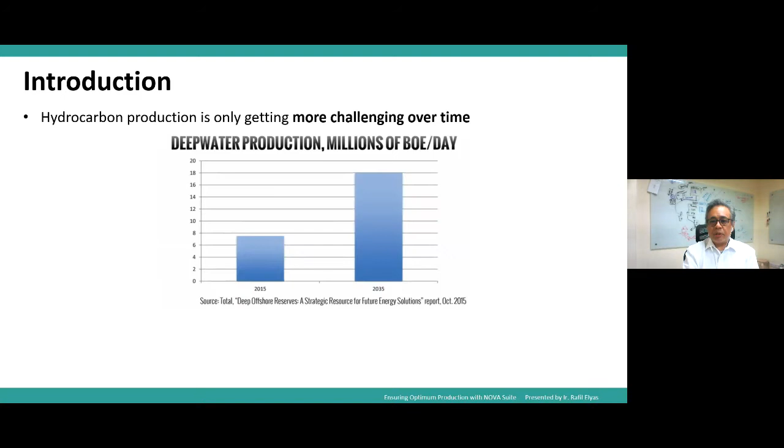There is a lot of pressure to reduce capital and operational expenditure, reduce risk, quantify profits, and provide business KPIs. If we take a look at deep water production, for example, hydrocarbon production is getting more and more challenging over time as we go into deep water production activities.

Within our business arsenal, simulation software and simulation tools are one of the things we use to reduce risks and quantify profits. So there's a lot of pressure to reduce capex and opex, and when we're evaluating different strategies, operating procedures, or technologies, we tend to find that simulation plays an important part of that.

A lot of innovation in the field of hydrocarbon production and processing is driven by the use of mathematical models or simulation.

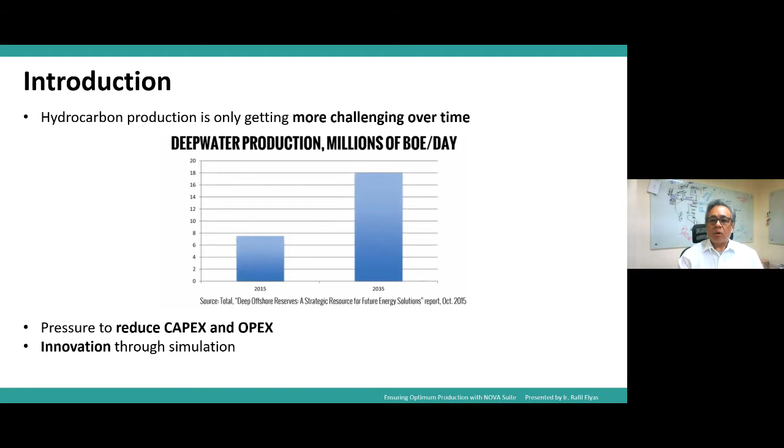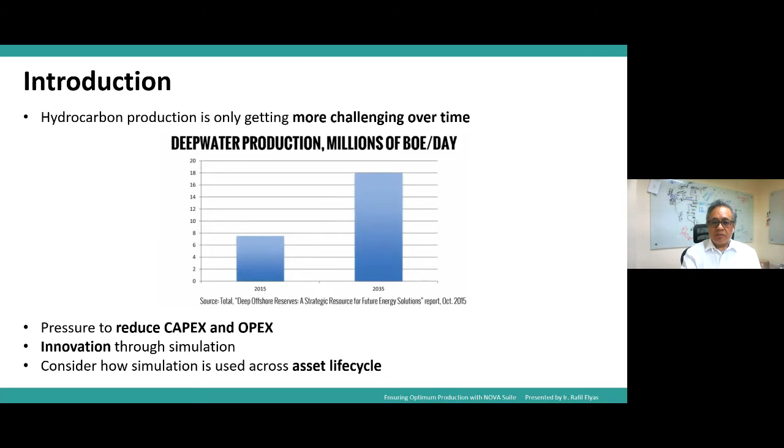So if we consider how simulation is used in the life cycle of an asset, typically we take a look at new opportunities, and within these new opportunities we would have to perform feasibility studies and conceptual designs. These are the kinds of things we would be addressing at this phase of asset development.

This might be some form of conceptual study, feasibility study, or pre-FEED. Based on this, we would have to start quantifying how much it's going to cost to develop this particular opportunity in terms of the assets we have to construct. So normally in these phases, you'll do some kind of computation, plus or minus 40-50%.

After that, if we're in the oil and gas business, we'd go into front-end engineering design. If downstream, you go into basic design. At this stage, we would perform computations to look at equipment parameters and roughly equipment sizing. If upstream, we'd look at field layouts, pipeline routing, pipeline sizes, etc., taking into account all the different flow challenges we would see. So there would be this type of computation at this phase of the asset.

Once we get some preliminary information, this will allow us to perform computations within plus or minus about 20-30%, again an estimate. At every phase, we'll be taking a look at costs and benefits.

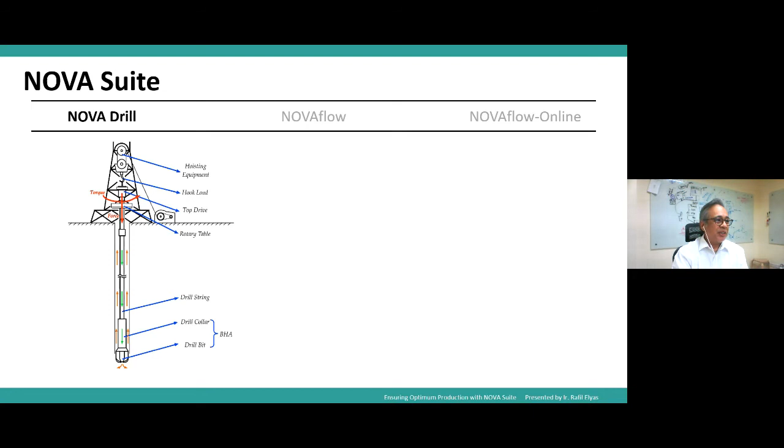So what does this Nova suite of applications consist of? Well, the first is Nova Drill. Let me preface this up front - I'm not a driller, so I might represent the discipline badly. If I do, don't be shy to chuck something in the chat saying, hey, stick to processes and molecules.

But Nova Drill is one of the applications coming out of Nova Suite. It came up because there was a requirement from a company in Asia where they wanted to create a real-time drilling monitoring center. Whenever they do a drilling campaign, they want to have this shadow drill, this virtual drill, happening. So if they have problems, they can immediately turn to these shadow models to troubleshoot. If I have a sudden gas kick happening, I can use my model to look at different strategies. So it'd be like a digital twin of a drill.

A lot of times when we look at drilling software out there, I'm not saying all, but quite a bit tends to be based on steady state drilling models. I know there are some tools which are multi-phase transient, but a lot of the tools out there are not able to model important transient phenomena like well kick, and sometimes there's an effort to rerun when the inputs have changed. So a lot of the drilling applications, when I say they're not really transient - to be detailed, what I mean is they're dynamic, but based on pseudo steady state approximations, and there are some limitations to that.

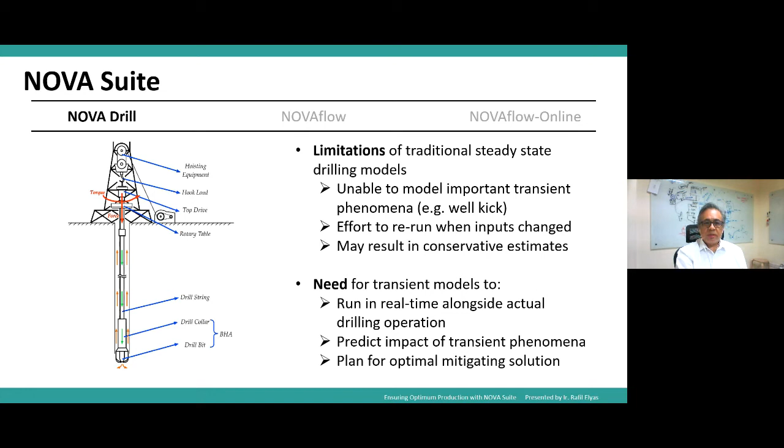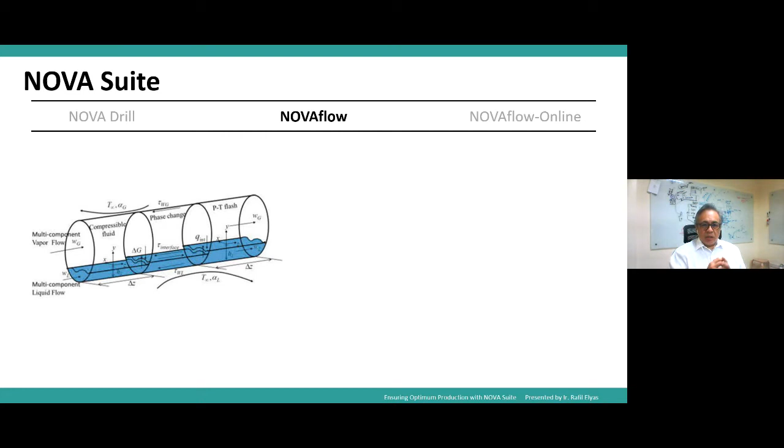The next is Nova Flow, or Nova Flow Pipe, and this is essentially looking at multi-phase fluid flow in a pipe. If we take a look at traditional transient multi-phase one-dimensional models out there, there tends to be a steep learning curve. And as I've articulated earlier, there's been a lot of effort to add more physics, more representations of the Navier-Stokes equations, which results in fairly slow runs because it's so complicated. It takes a long time to run, and we find there's a point of diminishing returns - you add more resolution, more mechanistic reality, but your returns don't really improve so much.

So there needs to be flow assurance models that are easier to use, which allow you to run faster than real time, and quickly and automatically self-tune. This is important because, as I mentioned, project schedules are getting more and more aggressive. Resources are getting lower, everyone is being more competitive. We need to be able to adapt quickly, we need to have some agility in our design.

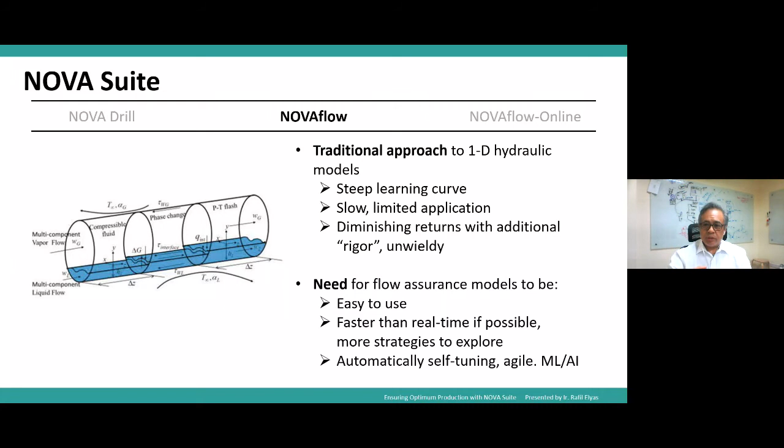I get some initial production data or predictions from petroleum engineering or reservoir engineering. So this is my production profile, this is my gas oil ratio. And I start designing things. I design my pipeline, I design my facility. I calculate all of my set points based on this production profile and this GOR. And I'm using this for front-end engineering design.

And as I go into detailed design, something has changed. Why? Because things are always changing in the field for whatever reason. Now I can't access these wells, I'm looking at bringing in some other wells, or I have another opportunity. I can bring in some additional hydrocarbon storage resource, and I want to pull these wells in. So now I want to increase my throughput, and my GOR has changed. So you need to do a new set of runs. And by this time, you're getting into detailed design.

And things must happen faster. So we need to have faster computations and faster representations of our solution space.

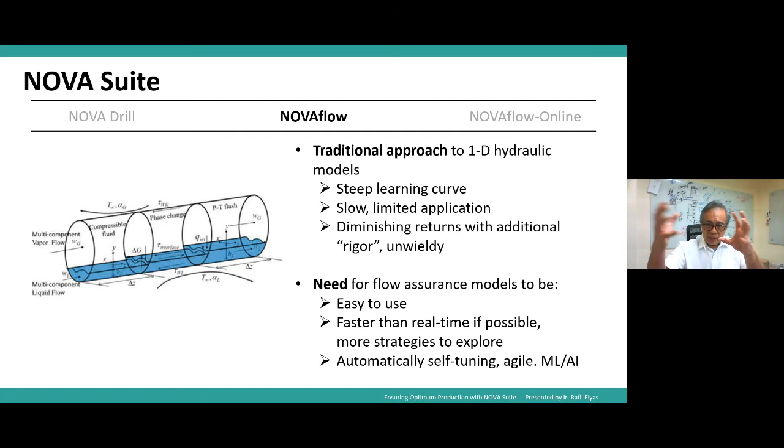So that is a NovaFlow, a pipeline, transient pipeline type application.

So now I'd like to talk about NovaFlow Online. Another particular area that we have is what's known these days as digital oil field. There are many types of applications out there, and we've used and supported many different types of tools. Everything from tools like 4Gas for gas field management, production, and optimization, to various types of back blending and back allocation applications used by various operating companies.

And one of the things that we found when working with these kinds of oil field type applications is that a lot of times information exists in silos. You have data from OFM, you have data from various types of reports, they're all over the place. A lot of the mitigation, or a lot of the activities, tend to be reactive, and there's a lot of uncertainty in terms of estimates.

What we're looking at here is a new way to design and operate your facilities. We're looking at these models, updated based on field data, and the way we're envisioning it, since these models are updated all the time, operations can use it for day-to-day troubleshooting. At the same time, you can also deploy these models to contractors to make sure the models they're working with are consistent.

So ultimately, this is all based on a cloud-based solution, so you can manage and assign permissions to these models for various people to use. You can create accounts.

So let's say you're a big oil and gas operator, you've got all of this data in Pi. You can start using it to tune your models, have those tuned models sitting on the cloud, and your operations team can use it. If you're outsourcing some brownfield work and you'd like another organization to look at sizing or debottlenecking, you can assign permissions and allow a third party to access that. Of course, there's a lot of cybersecurity that one needs to set up, and I'm not going to pretend I know how all of that works at this point in time.

But we've got an IT group who are familiar with all of these types of activities.

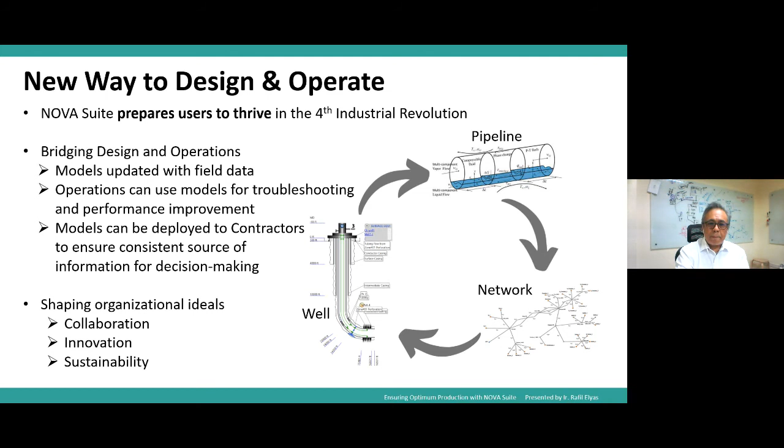Okay, so let me jump real quick into digital oil field applications with NovaFlow. This is kind of what it's going to look like so far.

So this is essentially going to be a cloud-based application. When I say cloud, there are many ways one can deploy a cloud. One would be a public cloud, like Google Documents, where anyone can log in. Or if you're a very large organization with your own oil and gas company net, you could place this on one server and deploy it to all of your users. So it's a cloud, but it's within your particular network.

The nice thing about cloud applications is it takes away the cost of ownership for a lot of your users. Right now, if you want to run a sophisticated piece of software, you need to buy a high-powered computer, and you need to manage all the different version controls, patches, etc. That can be a real pain, you need your IT group to manage that, and you spend a lot of money on hardware.

So now I think everyone's moving to the cloud, it's not a new thing. For some of us here, probably from the 1980s and 1970s, a lot of us in school used mainframes and dumb terminals. So it looks like it's going back to that model, where you have everything in a mainframe or a cloud, and you're working with low power, thin clients to interface with your computational engine. I think everything is circular - fashion, computing, all goes back. I'm just hoping flare pants don't come back again.

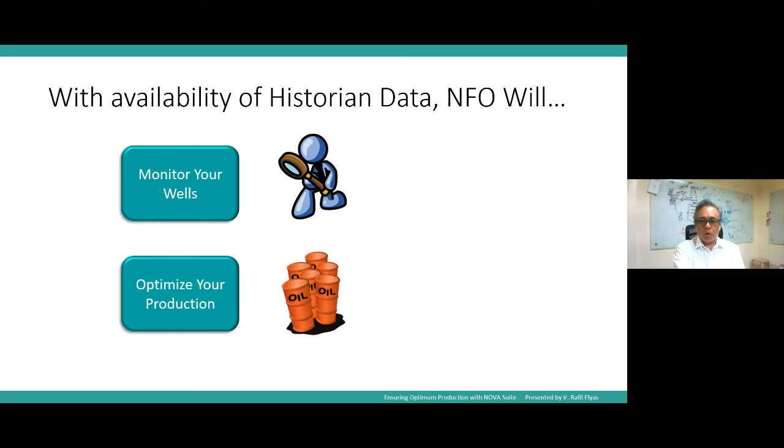When we have a lot of availability of data on data historians, a lot of organizations are using tools like Pi, or if you're an Aspen house, you'd be using IP21, or if you're a Honeywell user, you'd be using something like PhD. What NovaFlow Online will allow you to do is monitor your wells and optimize your production.

What we're looking at is essentially tracking and visualizing your well performance in real time - we'll show another slide where we can actually see what this means. But it's obviously interesting to know where you're operating and what the implication of your operating point is.

You always want to make sure you can understand or determine where your well production envelopes are - safe operating envelopes, optimum operating envelopes - and make sure you're operating within these limits. You also want to be able to identify well underperformance.

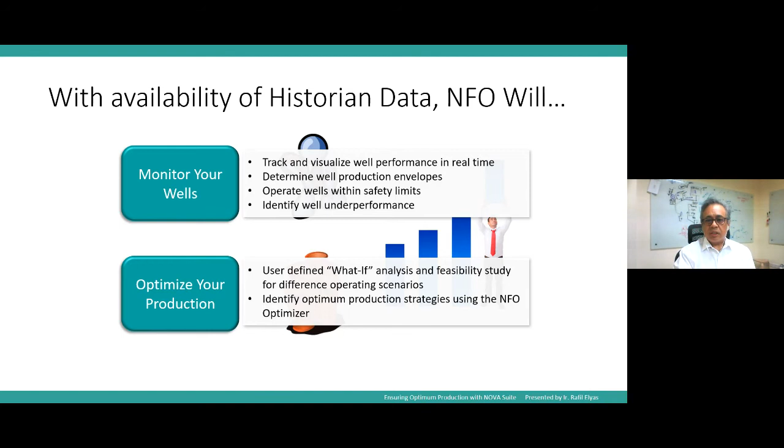You want to be able to optimize your production, put together case studies, do what-if studies, feasibility studies, take a look at different operating envelopes, and take a look at a solution space rapidly. You want to be able to identify potential optimum production strategies, and this can be done using the NFO optimizer.

So these limits might come from various sources. Your optimum limit might come from a computation. NovaFlow also has the well tubing model in place, so you can calculate what your optimum limit is going to be. Your safety limit might come from field advice. All of these can be implemented within this particular view, so you always know where you're at.

And you'll essentially be exchanging information with your data center. So if you've got stuff in Pi, then it'll be stored in Pi. And then we'll have an optimizer layer, which will allow you to run your case studies and to essentially calculate your optimum points.

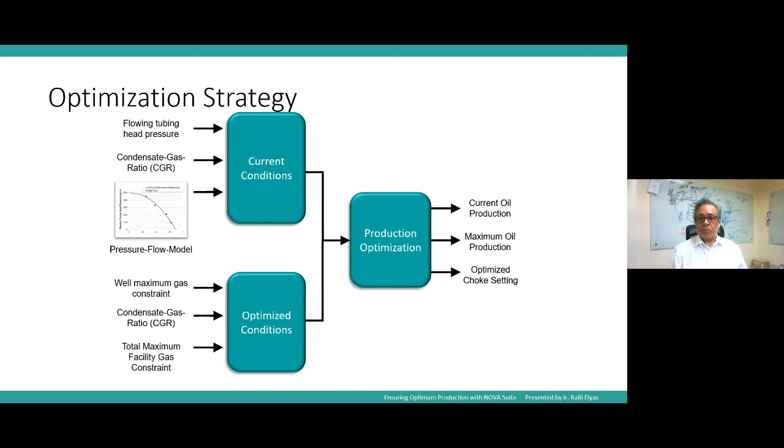They're just running many calculations very quickly. Nowadays, with multi-core CPUs and multi-CPU machines, we can parallelize a lot of computations, so things can happen a lot quicker. Essentially, the hardware has caught up with a lot of the scientific and mathematical theory that's been around since the 1960s and 1970s.

What if studies in optimizations? This is an interesting activity as well. So say, for example, in this particular case, I've got 3 wellheads going into one central processing platform - Alpha, Bravo, and Charlie - and they're feeding in. Let's say in this case, everything is up and running, and I've got my production at a certain rate.

What would happen if wellhead platform Alpha trips? What am I going to do? Well, I still need to try and meet my nominated flow rates. Do I have enough? Can my wellhead platforms Bravo and Charlie compensate? Do I have enough ullage in my pipeline to cover for this?

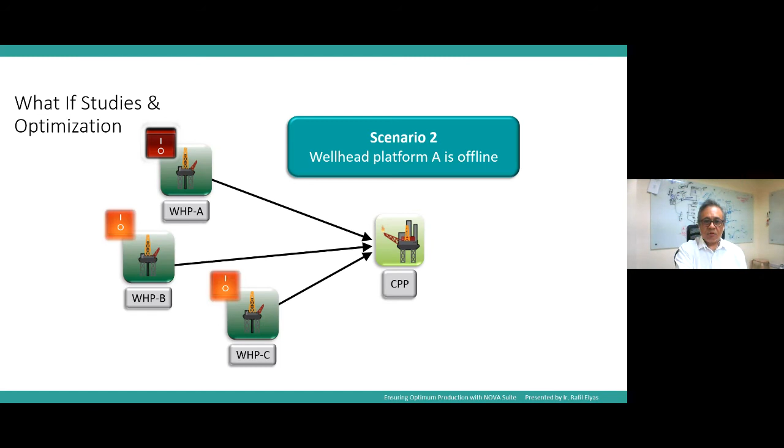What scenario 2 is: what happens if wellhead Alpha is down. So in each of these cases, what would be the optimum choke setting, or how should I be operating my wells? In this example, I can perform this optimization computation very quickly.

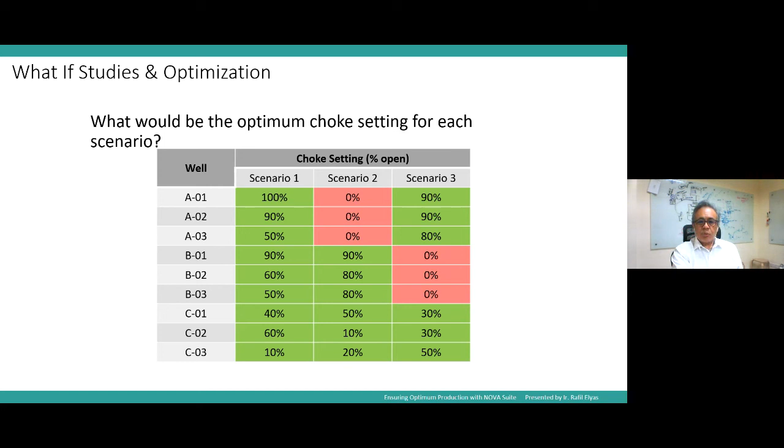So this is one of the activities we can look at from these particular models.

Another thing we would be looking at is production forecasting, where we can take a look at field data to calculate certain derived variables, for example efficiencies. This would be more for topside facilities - if I take a look at the processing efficiency of a topside facility in terms of dehydration, compressors, etc. These are some of the activities we can represent within this digital oil field solution.

With regards to the NovaFlow online application, some of the key values we have with this data is we can essentially take a look at getting a handle on the operating efficiency and accurately identifying potential areas for operations improvement or enhancement, for decision support, data management, and production optimization.